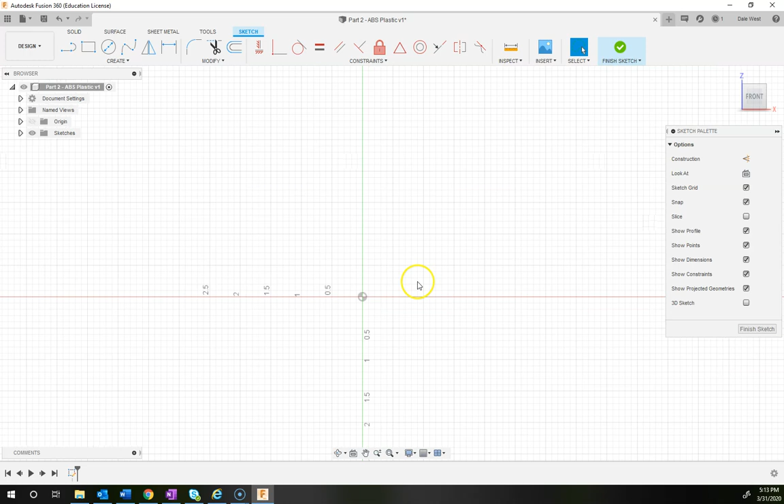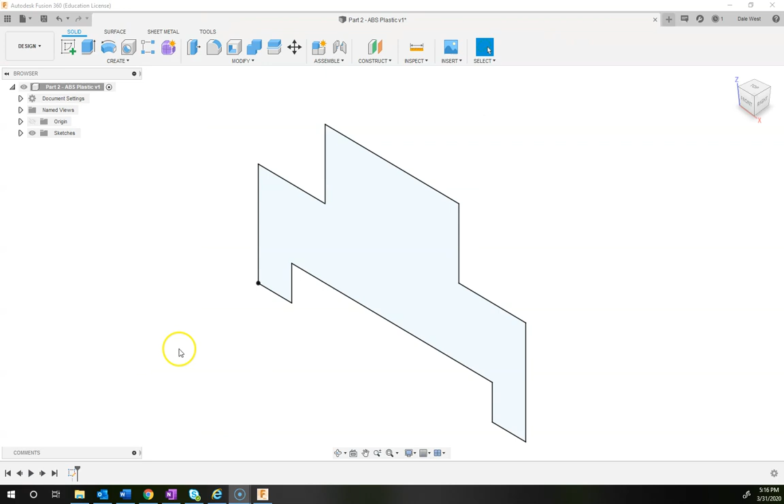We're going to start a new sketch on the front face, and remember we're going to start at the origin. What I'd like you to do is go ahead and create the front view of this model and then extrude it to create the part. I'm not going to show you how to do that because you should know how to do that already, so pause the video and go ahead and do that. Once you're done dimensioning, go ahead and hit finish sketch, then hit the home button on the view cube and yours should look like mine.

We'll go ahead and extrude, and I believe it was 1.25 for our depth. I'm going to hit enter or click OK. So that's where you should be - you should have this done, you should have been able to do all that on your own. I'm going to go ahead and do a quick save, say OK, that'll create version 2 for me.

The next thing we're going to do is materials and appearance. So to do materials, I'm going to go modify, physical material, and if you remember from the directions, I'm going to collapse that. We want to go to plastic, so I'm going to expand plastic. There's my ABS - I'm going to left click and drag it onto my part, then close that window.

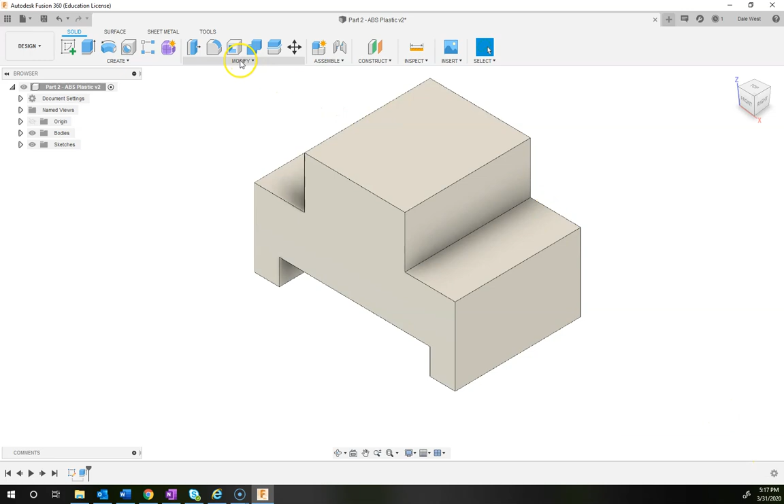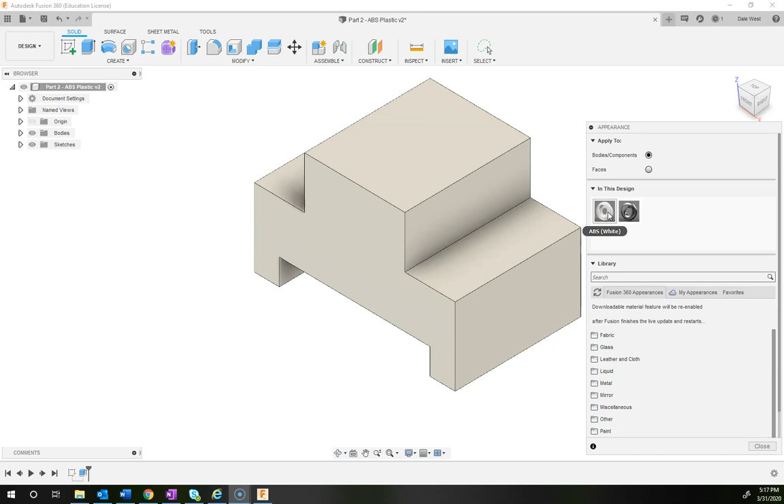Now for appearance, you could go I believe to the same spot, or if you notice you can click A on the keyboard. So I'm going to click on appearance - appearance will maintain the material but you could change the color of it. If you notice right here in the design, here's my ABS plastic. I'm going to double click on that and you should get a window that pops up. For some reason mine's going off the screen a little bit, let me just move this so you can see it.

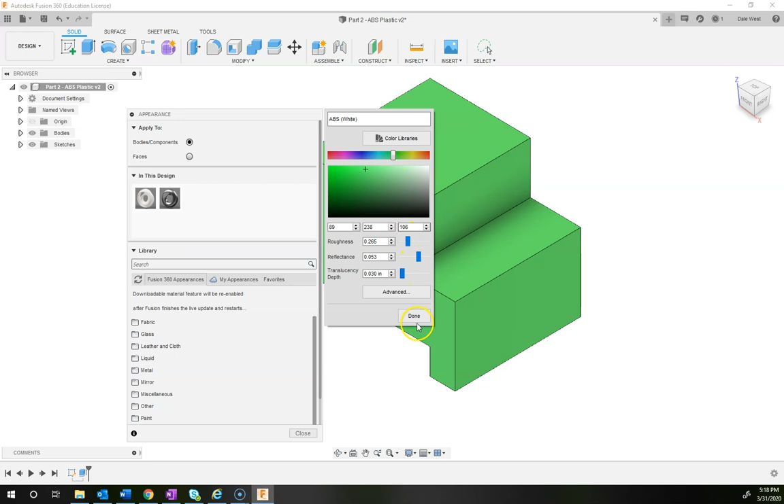When I double click it, that window should pop up, and then you can go ahead and drag your slider. I don't want it to be white though, so move the cursor somewhere - click somewhere in the spectrum here, and then you can drag this to get to a color you want first. So let's say I want to go green, and then do I want a bright green or a darker green like a forest green? Kind of drag the slider and pick what tone you want based off that color. So I'm going to go green - you pick whatever color you want. When you're done, hit done, say close, and then let's do a final save on the part.

Say OK, and then now we can go ahead and do the drawing. I'm going to go to the drop down, go to drawing, hover over it and click on from design - I want to make a drawing from this design. Now we did have some differences compared to the last one.

If you remember, I want you to use an ASME template, and specifically an A-size piece of paper. So it's already set up to ASME, but the sheet size - we're going to go 11 by 8.5 for the A, and then I'm going to say OK.

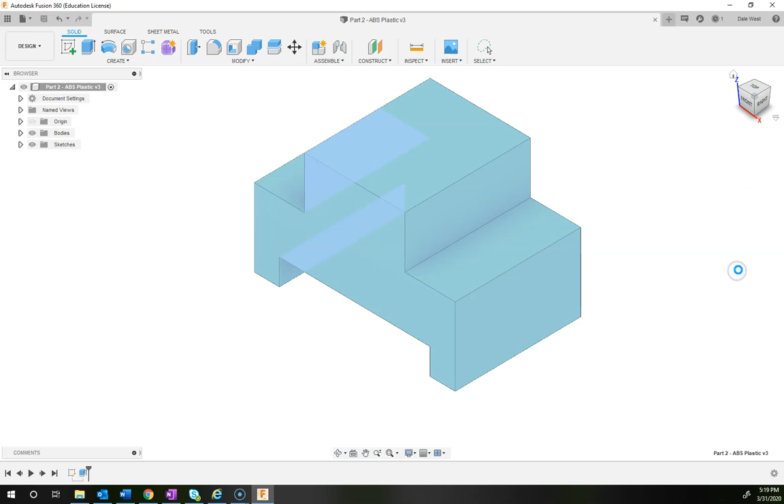Now, let's just say you made the drawing and accidentally picked the wrong sheet size. What you could do is go down into the settings, the sheet settings, go into sheet size, and pick which one you want. So you can do that under sheet size if needed.

The other thing I want to do, since we're down here already, is click on the annotation settings and turn on trailing zeros, so display trailing zeros. Go ahead and do that. Since I was changing some settings, that base view went away, but we'll get to that in a second.

Let's go ahead and fill out the title block while we're here. For the drawing number, remember to get into the title block, hover over it till it's highlighted, then double click it. Now we can click into any of these areas we want to change. The only one I really want to fill out is the drawing number, so I'm going to double click right here on the blue drawing number and type in number 2. Then I'll click OK, because this is our second drawing for this assignment.

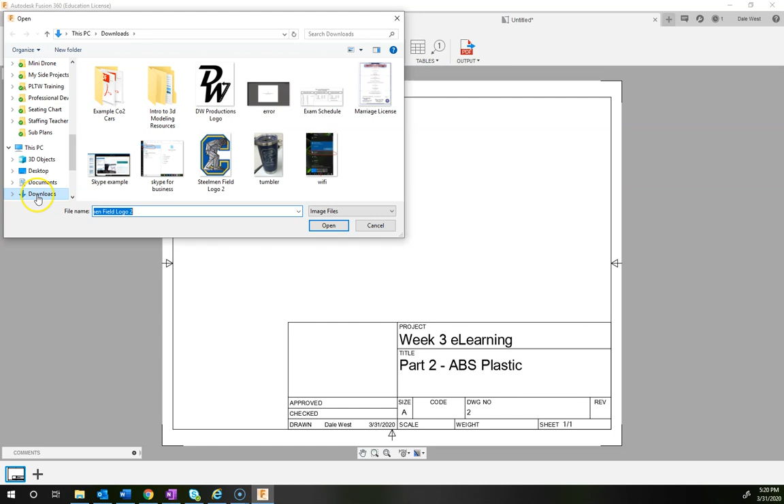Finally, let's add in our picture again. If you remember from the last one, we saved a picture of the Steelmen, so hopefully you still have that in your downloads. Go ahead and click Insert, navigate to wherever you have it saved. I put my picture in the downloads, so I'll click on that and open it, and bring in that picture again.

Now, don't snap to that, I don't want to snap to that. I kind of want the lower left corner to be somewhere about here, doesn't have to be exactly perfect. Then I'm going to adjust that scale again, try 0.4 again. That looks pretty darn good. I'll say OK.

Remember, if you're not happy with the location, click on the edge, click Move, and click the middle. Maybe I want to go a little bit to the right. If I'm still not happy with it, I can click again, move it wherever I want it to be. I just want to try and get it somewhat centered in that space, then click OK.

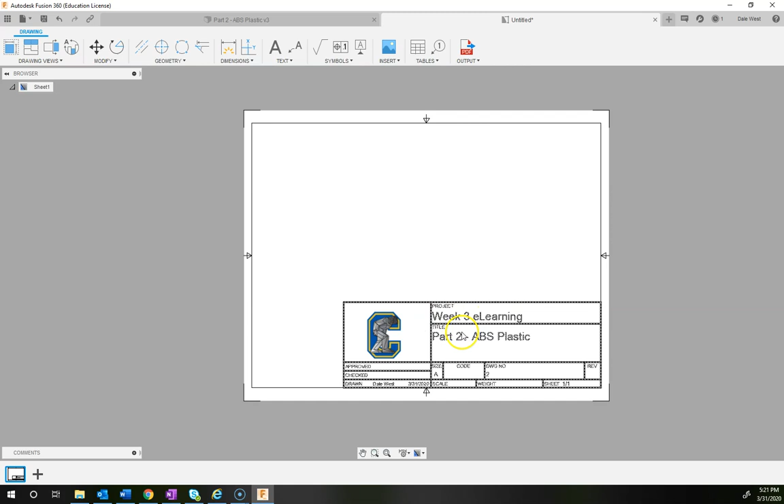Alright, so we got the sheet all set up. It automatically inserted the project name, automatically inserted the title, brought in my name and the date. It'll bring in the scale once we actually bring in the drawing.

So let's go ahead and start left to right. I'm going to go with the base view, left click up there. We don't want a 1:2 scale, let's do a 1:1, we got enough space for this. So I'm going to drop down—is it going to let me do it?

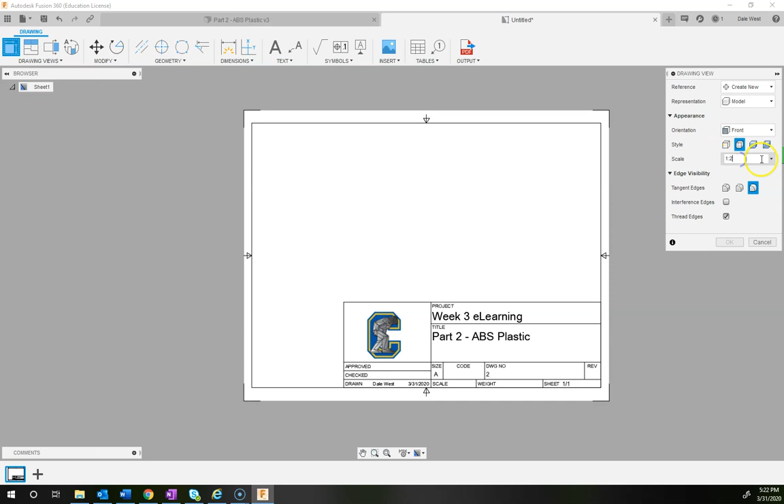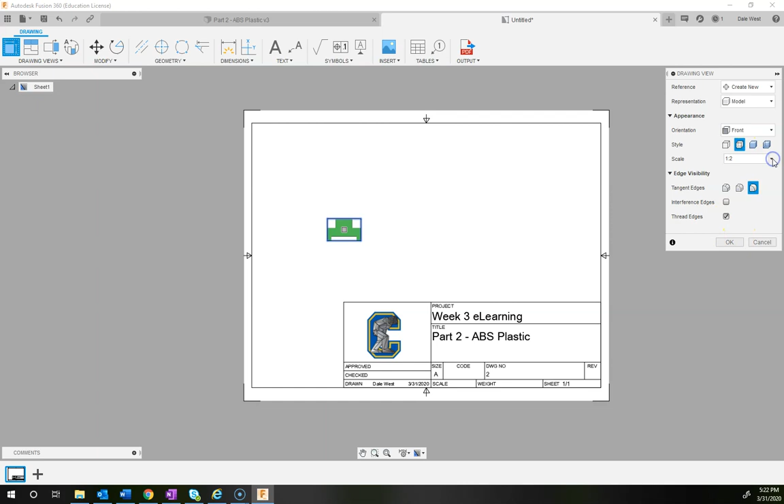Alright, for some reason the drop down isn't cooperating. Not sure what's going on. Let me click on that again. Alright, let me try this one more time. Something's not cooperating here. Normally it lets me hit that drop down and change it to 1:1, but alright, I'm just going to place it and say okay. Let's see. Well, let me do it now. Maybe it's—what's going on here? Oh, for some reason it's popping up on my other screen.

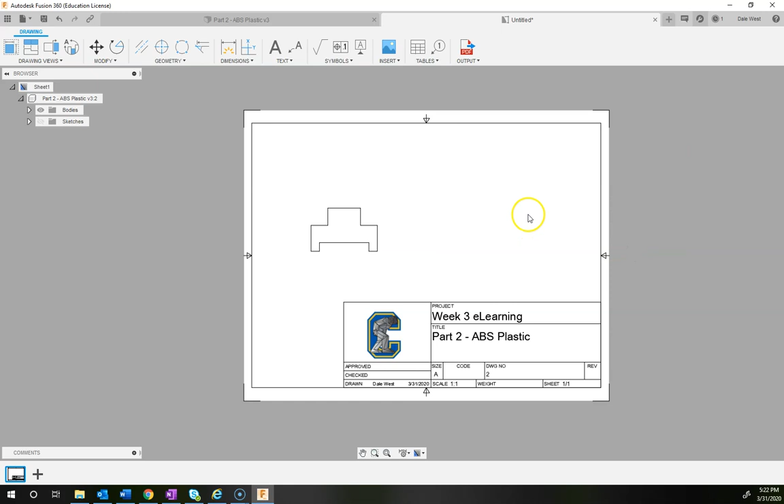I'm using dual monitors. For you, you should see a drop down—go ahead and change it to 1:1. So change that to 1:1, and then you should be able to leave everything else. I'll say OK. Then I'm going to click on that, left click this little box and hold and drag this down about right here. We might have to move that later, we'll find out.

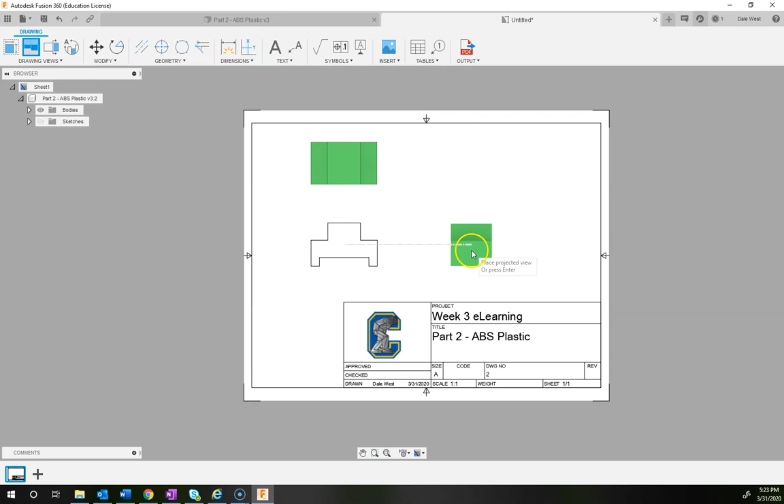Let's go ahead and project the other view. I'm going to go projected, and notice it automatically projects from that one. So I'll left click for my top view, left click for my right side view, left click for my isometric, and then once I'm done I have to right click and tell it I'm done by right clicking and choosing OK.

Let's fix our isometric. I'm going to double click on the edge of that, change it to shaded, and then hit close. I'm going to position that shaded isometric—oh, I got to click on that gray dot. I always want to click on the edge for some reason, probably because of Inventor. I'm going to left click and move that up into the top corner, then left click off of it.

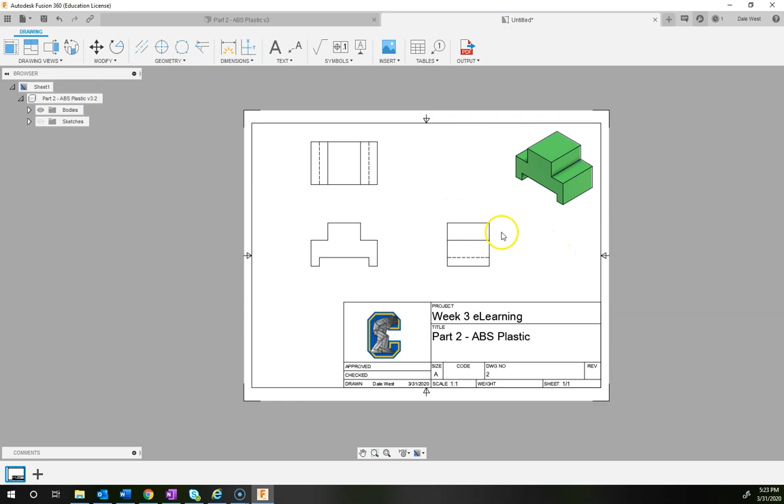And what else do we got? Okay, I think we're good, I think we're ready to start dimensioning. So let's go ahead and talk about dimensions. Remember, we want to use unidirectional, which is just standard in this ASME template, which I'll explain in a minute. The new one that is maybe fairly new is chain dimensioning, if you haven't heard of or seen that before, but you should have because of what you did in the previous project or assignment.

So let's go ahead and start dimensioning. I'm going to do a size dimension here.

And then I'm going to do a size dimension here. Right click and say OK. Oh, it didn't add that other one. Let's add that back in right there. But we got a problem.

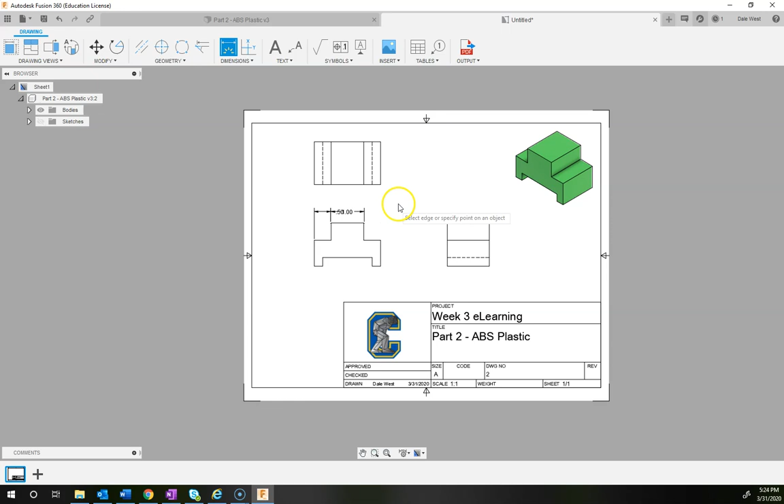We have some dimensions running into each other. So I'm going to escape to get a dimension tool. I'm going to zoom in on that for you. Now you got to be careful because you got to pay attention to which one you're trying to click on. I'm trying to get on the 0.5. I want to click on that. And I want to click and drag that gray box for the text over to the other side.

So now they're not running into each other, following standard dimensioning procedures. I'm going to add in another dimension from here to here. I'm going to pull that down, snap. I'm going to add in another dimension from here. No, I'm going to hit escape. I'm going to come back to that in a second.

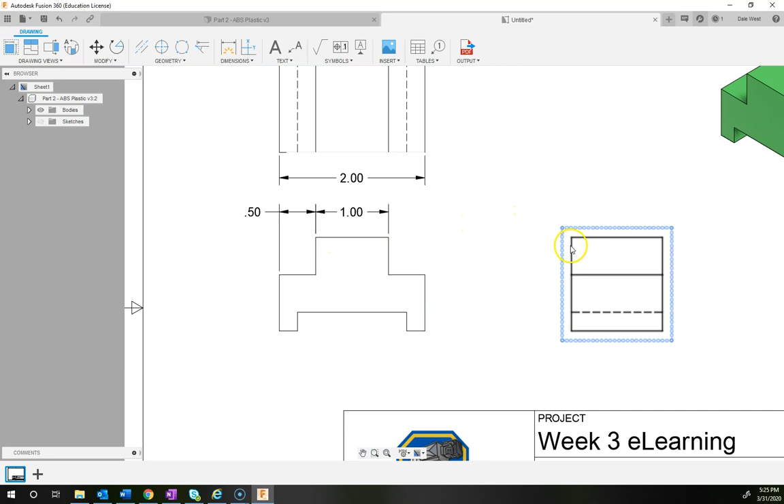And I'm going to do another dimension from here to here, from here to here. Giving my overall height, my overall depth, and my overall width.

So we're still missing some dimensions, and I wonder, can you count how many missing dimensions we still have? I'll give you a second to think about that. What dimensions are we missing? We're actually missing 4 dimensions.

We need some location and size dimensions here. So to do this though, we're going to use a chain dimension. So I'm going to left click on dimension first, and I'm going to add in this dimension. And I'm going to add that in. I'm going to hit escape.

I'm going to grab this dimension. I'm going to pull the 0.25 out over here. Left click, add that in, hit escape. And then now I'm going to use a chain dimension.

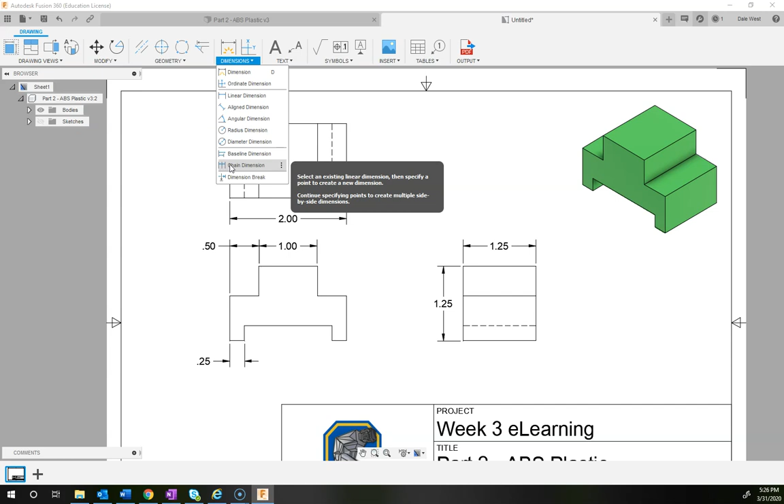What is a chain dimension? If you look, chain dimension, it goes from one dimension right into the next, which is different from baseline. You can see the example in the graphic there. So I'm going to click that. Notice it says select base dimension. I'm going to click this edge right here on the 0.25.

Notice it's chaining off of that edge, and now I'm going to left click there. Hit escape. Oops, I don't want to hit escape. I want to hit right click or hit enter. So alright, I'm going to try it again. Chain dimension, left click there, and then I need to right click and say OK. So that is chain dimensioning. Chain dimensioning is going from one dimension right into the next.

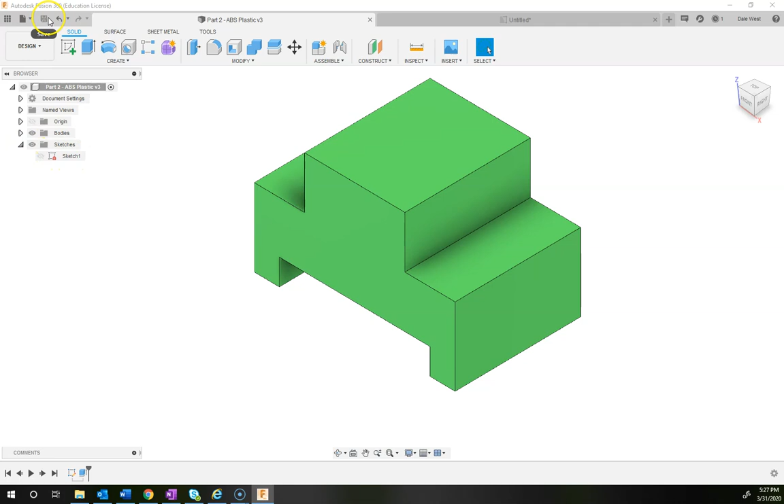Okay, so that's that one. I also wanted to remind you, if you're catching any mistakes, if you see a number that's wrong, go back to the part file, go back into the sketch, double click on it, make your changes, hit the save button, come back into the drawing, click the little link button which will pull in the newest updated version into your drawing, and then it should be good. So make sure you're doing that if you catch a mistake.

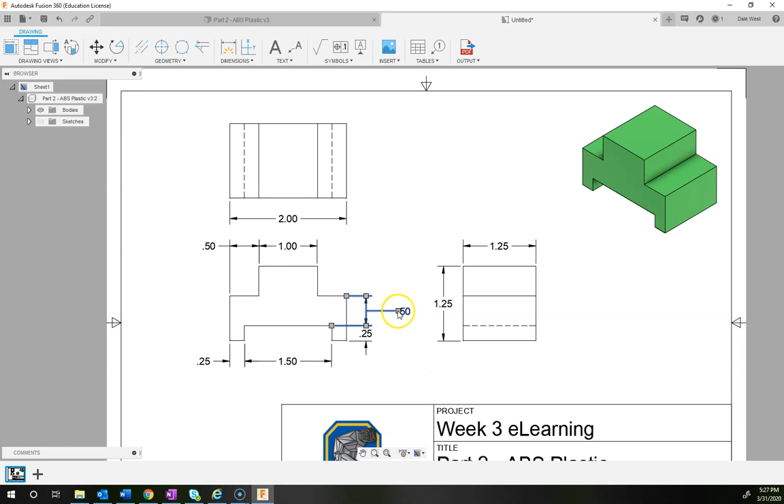Let's do some more chain dimensioning. I'm going to go dimension from here to here, add that in, hit escape. I'm going to drop down, I'm going to go chain. I want to chain from here to here. Right click, say OK. I don't like the way that 0.5 is positioned, so I'm going to click on it, left click and drag the text up, and I'm going to go like that. I like that better. That looks a little bit more neater.

I think that's it. That is every dimension that we need, but we still need to add in, I want to add in a note like we did last time, and then we'll save after that, and you'll screen clip into your binder. So let's use a text tool. I'm going to drag out a nice big kind of text box over here, and I'm going to start typing all caps. For this drawing, we used an ASME template to create

unidirectional dimensions. We also used chain dimensions in the drawing. So just again reminding you what we did. I'm going to click close on that. So it's just a reminder like, hey, these are chain dimensions.

I know I didn't talk about it, but you should know what unidirectional is. Unidirectional means that all horizontal and vertical dimensions are all facing in one direction. So notice how these are orientated in the same direction versus the aligned dimensions where the vertical ones were flipped. They were turned sideways. Alright, so that is that one.

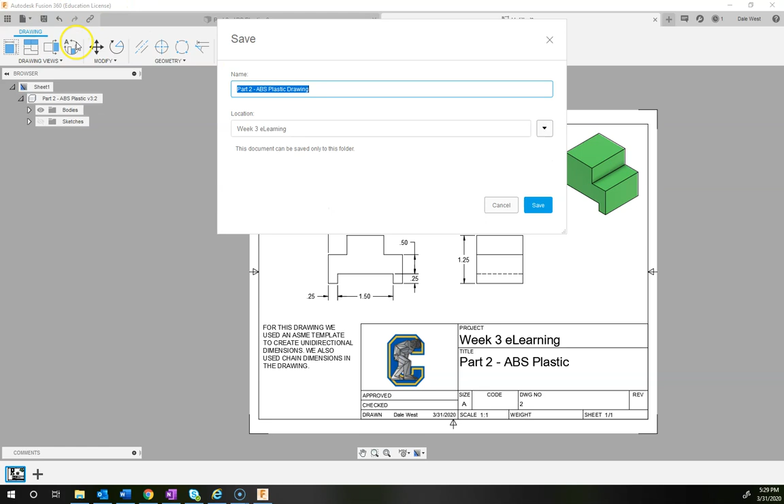Let's save it. Make sure it's got the right name. That's good. It's going in the right spot. I'm going to hit save. And then I'm going to use a Windows Shift S. I'm going to grab this thing. And I'm going to go into my OneNote binder. And I'm going to paste it right in there.

I'm going to resize it. Make sure it's not going so small, though, that Mr. West can't read it. So make sure I can see everything. Notice it automatically did add in that scale for us when we brought in the model. And that is it for that part 2.